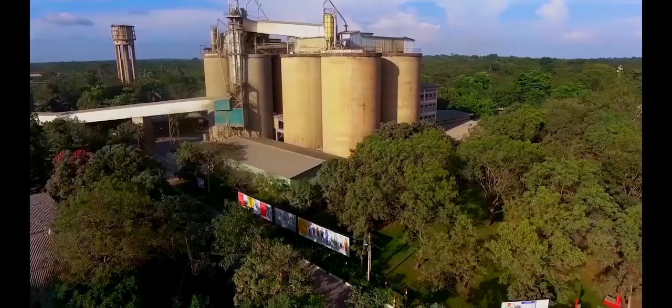INSEE is a proud member of the Siam City Cement Group Public Limited, a leading cement manufacturer in Southeast Asia. The Siam City Cement Group provides world-class construction materials to a host of countries around the world, including Cambodia, Bangladesh, Vietnam, Thailand, Indonesia and Sri Lanka. With a plethora of landmarks and buildings that define the skylines of these countries, the Siam City Cement Group pledges to be a role model in corporate governance and sustainable development.

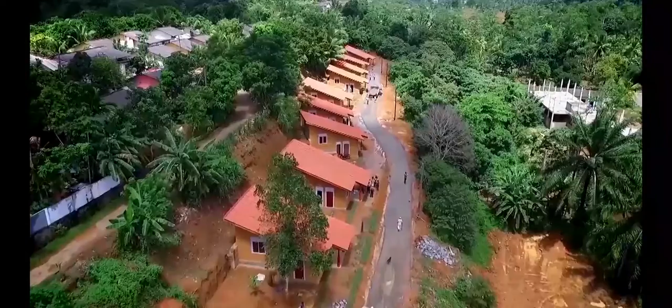INSEE Cement, Sri Lanka's premier cement manufacturer, is the brand behind our country's leading cement products and the driving force behind making Sri Lanka more sustainable. With a reputation built on outstanding performance in the quality of our products, unparalleled customer service, the dedication of our employees, our respect for the communities in which we operate, and our ambition to set the standards for the industry of tomorrow, we have contributed to the growth of Sri Lanka with iconic developments across the island.

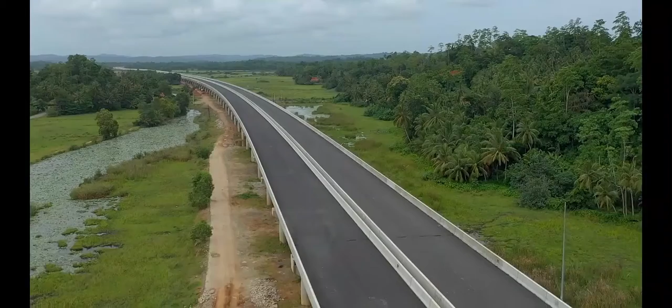Just to name a few: the Lotus Tower, Altair Residencies, the Colombo South Harbour, Southern Expressway, Mattala Airport, the Kalladi Bridge, the Kotelawala Defence University, Mahinda Rajapaksa International Cricket Stadium.

INSEE has cemented its position as the most preferred local manufacturer of cement in Sri Lanka, with its widespread distribution network comprised of over 7,000 dealers in retail segment located island-wide. Today, we have 2 plants in Puttalam and Galle and 2 terminals in Galle and Colombo.

INSEE's Sunstar brand is Sri Lanka's first cement product to be awarded the Green Labelling certification by the Green Building Council, and was the first blended cement to launch in Sri Lanka.

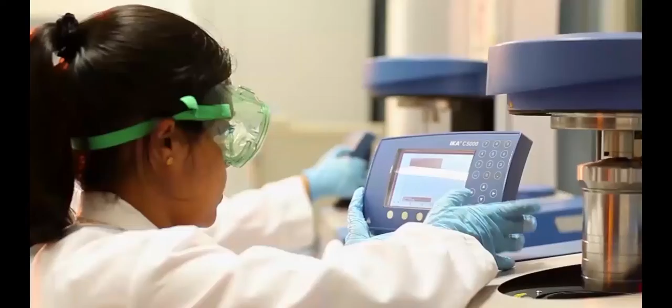INSEE has a wide portfolio of cements and services to suit all your construction needs. The most popular among them: INSEE Sunstar, INSEE Mahaweli Marine Plus, INSEE Extra for mass pouring concrete, INSEE Rapid Flow Plus, INSEE EcoCycle, INSEE Concrete, and Conwood by INSEE, a state-of-the-art innovation and development facility.

Professor Mudalige Thishan Renuke Jayasinghe, BSc Engineering Honours Moratuwa, PhD Cambridge, Chartered Engineer MIE Sri Lanka, MSc Sri Lanka, holder of Tall Building License of Urban Development Authority, and Senior Professor at the Department of Civil Engineering, University of Moratuwa.

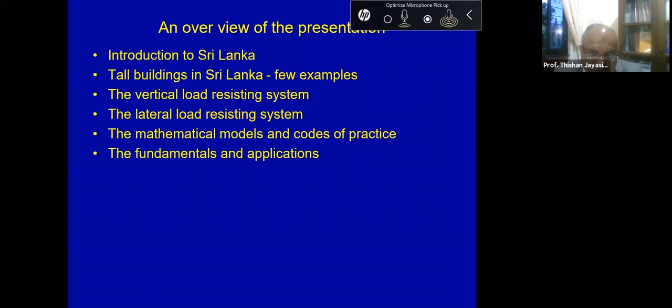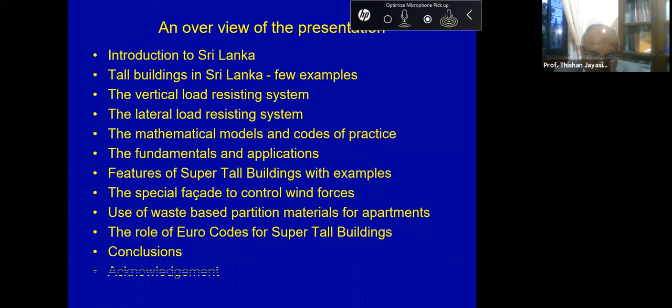Introduction to Sri Lanka, tall buildings in Sri Lanka, for example vertical load resisting systems and lateral load resisting systems, mathematical models, code of practice, fundamentals and applications, features of super tall buildings with examples, special facades to control wind forces, use of waste-based partition materials for apartments, role of Euro codes for super tall buildings, and conclusions and acknowledgement.

Okay, first let's look at where we are. A small island, 64,000 square kilometers, with a population of 22 million, about 2.5 million of whom live in other countries. Because of that we have significant foreign exchange inflow to the country, and we have considered it a good country to have tall buildings, especially in Colombo and other main cities, particularly apartment buildings.

So that we can have a large number of people living very close to the railway stations and so on. We have tropical climatic conditions, which are considered very good for retirement by many people. Because of that, with the right policies, it's possible to have many Sri Lankans who migrated to other countries come back to live here during their retirement, and that can generate significant demand for tall apartment buildings.

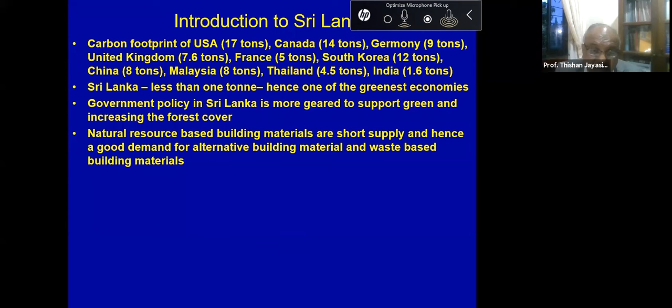If you look at some statistics, in Sri Lanka we have tropical climatic conditions, and because of that we have a very low carbon footprint, less than 1 ton. Again, we have government policy geared towards increasing forest cover, and there's also a shortage of natural resource-based building materials, so we are keen to go for alternative materials like EPS-based lightweight wall panels.

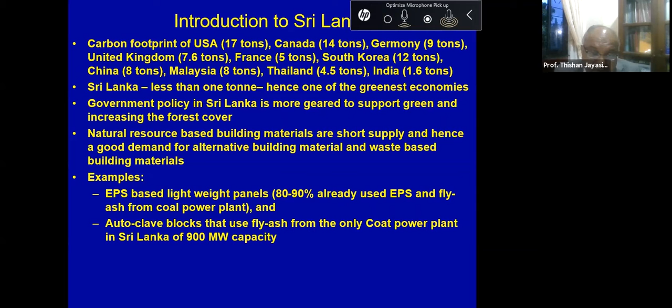About 80 to 90% of the EPS is already used once, and then we also use fly ash. We have autoclave blocks manufactured in Sri Lanka, and EPS-based lightweight blocks manufactured here too. So converting waste to building materials is a good business in this country, because we have high prices for natural resource-based building materials.

If you look at buildings, this is the tallest building at the moment in Sri Lanka, the 67-story tall Altair building. This is a picture taken while construction was underway. You can see the inclined tower made of steel was constructed without any support for 41 floors. During design, we actually checked the vertical tower for this particular condition.

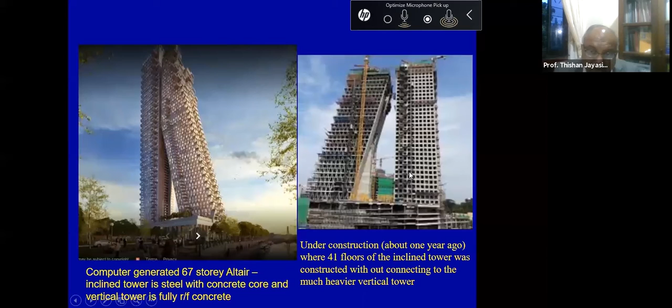You can see the center core is vertical, only the tower is inclined, so it's a fairly stable building. Although the tower is inclined, the support structure, or the main core or spine of the structure, is vertical, and here you can see the spine. This is a huge, large, heavy building, all out of concrete. Once connected, this building was quite capable of providing adequate lateral stability. This is a computer generated model, because I did the checking, and I also certified this building for the government of Sri Lanka as a safe building.

You can see it has a special shape where the facade is not uniform. It's a fairly irregular facade, and this is the main wind direction as well. So the facade facing the main wind direction was very irregular.

It was designed by a world famous architect, Moshe Safdie, who designed some of the best buildings in Singapore and all over the world. There's another structural engineer who worked with him, Predrag Gera. He's from former Yugoslavia, a very talented structural engineer who specializes in tall buildings and other buildings mainly.

I was the check engineer, because we have to make sure that we certify it. The coordinating engineers were Deepal Wickramasinghe and Mr. Bimal Fernando, one of my batchmates. That's why I got a chance to get involved in this particular structure, creating the model and analyzing it. The results of this model were used by Mr. Bimal Fernando and his team to check all the individual members, so that individual checking was done by them.

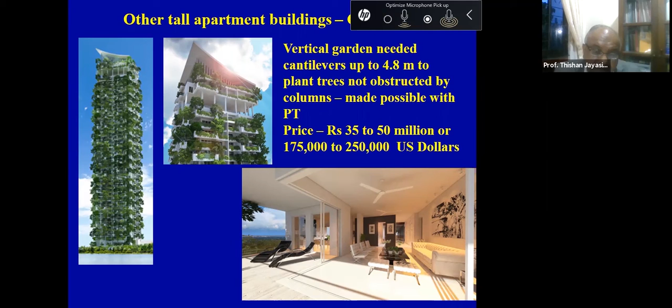Today he has designed the tallest building in Sri Lanka, still under construction, Colombo 606. Mr. Senaka has designed the tallest building, having 77 floors, in Sri Lanka, and he's a very good structural engineer.

And he designed this building as well. There is Sky Garden. And then he also designed this Fairmount building.

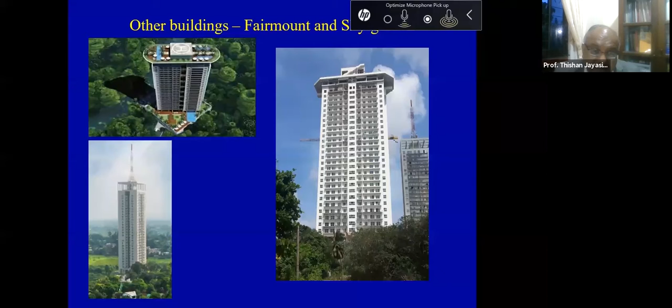The Fairmount building is the first tallest building undertaken by Maga Engineering on their own, not for anybody else, but for their own property development. Maga Engineering undertook this 32-story Fairmount building, and immediately after that they went for Sky Garden, which has double transfer floors. Again, Mr. Senaka designed these buildings.

Then this is Crescat Residencies. Again, I checked this building because it was initially planned as an office building but later converted to an apartment building. So because of that they wanted to check it. I made models, and this was checked in 2007 - I checked this building.

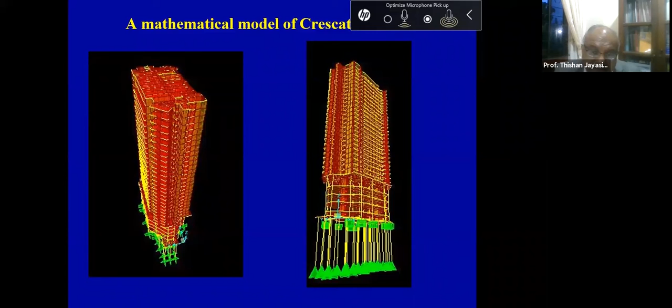So how do you get confidence when you are designing tall buildings? Can you get confidence by just following Euro codes or BS EN codes, or by developing a thorough understanding of fundamentals and theories? The most important thing is you must develop a thorough understanding, because codes will help you, but they will never give you the confidence to sign and certify a tall building, especially very special shaped buildings.

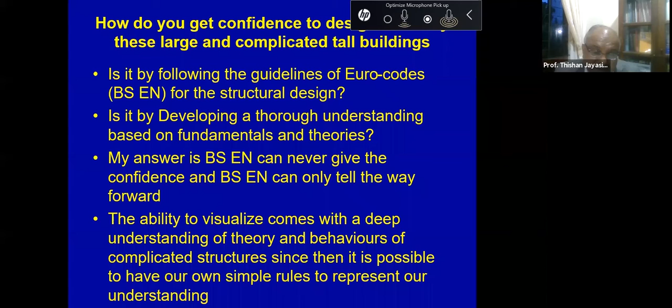Like Altair. So if you want to certify, you must be thorough with your fundamentals, and that's why we always encourage our students to learn the fundamentals and then applications, rather than going directly into applications.

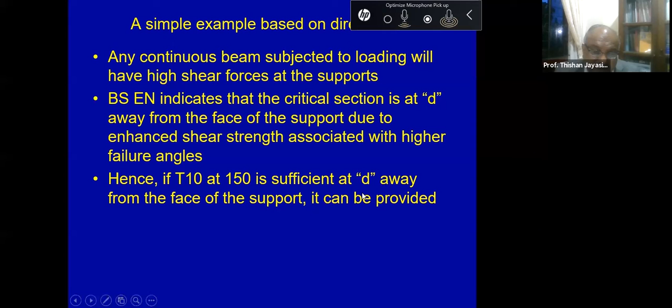So I'll take an example based on direct shear. Any continuous beam subjected to uniform loading will have high shear at the supports. When checking for shear, BS EN or Euro codes allow you to check it at a distance d away from the face of the support, and then you can provide the same reinforcement up to the support. So if T10 at 150 is sufficient at a distance d away, you will provide the same reinforcement within the face of the support and the depth d.

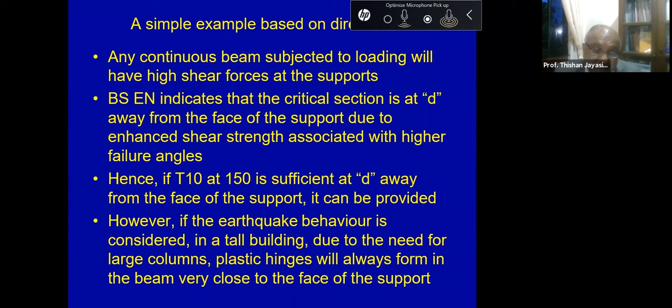But if you look at earthquake behavior, plastic hinges always occur very close to the face of the support. So if you just satisfy the rule given in Eurocode 2, you may not have a very safe building. You must look at Eurocode 8 as well, where you consider earthquake behavior, and then take the precautions given there as well.

So basically, you have to have certain rules that you have developed yourself. For example, if I am designing, I would not like to have a shear force more than 2 newtons per millimeter squared, because I know it's better to have a flexural failure than a shear failure. Flexural failure will always give us enough warning, whereas shear failure gives less warning.

So if I want to prevent a shear failure occurring, the ideal is - I know the maximum shear may be about 4.5, but if I keep the maximum shear stress less than 2 newtons per millimeter squared, then the chances of shear failure become very remote. Then if I am getting a high shear, I know the section I have selected is too small - that's why it's giving a shear failure.

In a reinforced concrete structure, increasing the width of the beam by 50 or 100 millimeters will not carry a huge penalty. So it's worth increasing the width of the beam by 100 millimeters rather than having a very high shear stress. You can have various rules, and the reason is you have to always think about which failure you would like to have, then ensure that particular failure occurs in the structure when it is overloaded. You take additional precautions against whatever failure you prefer. Generally, I like beams failing in flexure because it always gives sufficient warning.

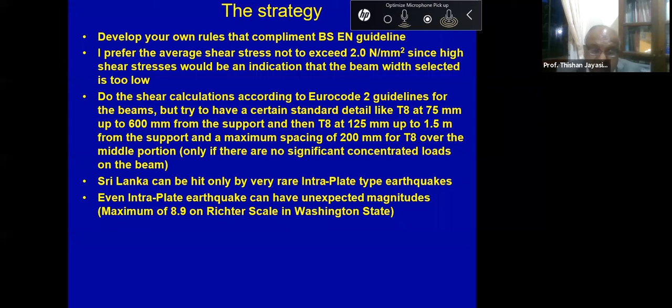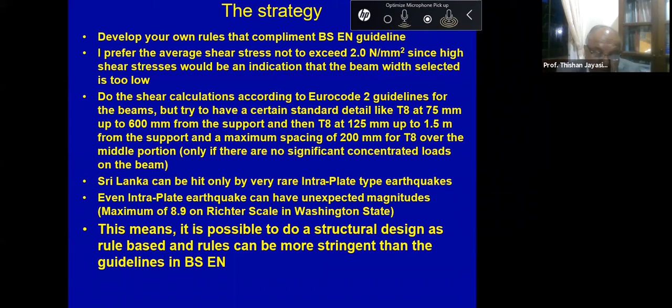So what you have to do is don't blindly follow the codes. Always develop your own rules, and then you can use codes and do the calculations. If the answers that you get do not tally with your rules, you can always recheck. But if you do not have your own rules, then there's no way you can check and ensure that your answers are correct.

So let's see some guidelines. In buildings, if you are considering the vertical load carrying system, the main vertical load carrying system consists of columns, walls, pile caps, and piles. Columns can be massive, but we can't increase the size of the columns too much, so because of that reason, we generally tend to use higher strength concretes in columns.

If you look at the Eurocodes, I will use only the cube strengths, because the Eurocodes allow us to use either cylinder strength or cube strength, so I'll talk only in terms of cube strength to avoid any confusion. We are allowed to go up to 105 newtons per millimeter squared, or megapascal, as the maximum strength, whereas in most constructions you will find that we are using 25 or 30 megapascal concrete.

Walls can be of any thickness, and as in Altair, if you want, you can use diagrids. The minimum reinforcement requirement in columns and walls according to Eurocode is 0.2%, BS code is 0.4%, but it's very usual to find that you are getting about 1.5 to 2.5% reinforcement.

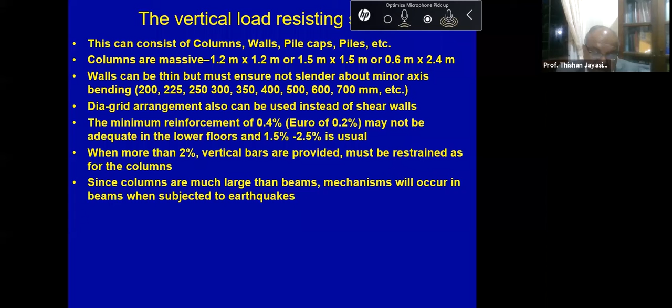So you can see, very special precautions are needed. Once you have this kind of knowledge, where you look at it in a more objective manner rather than just as a mathematician, it will give you a lot of confidence that your structures are good and correct.

You have to take adequate precautions when you are having columns, beams, piles, and especially the ground beams and so on. So you can see, you can have very special shaped buildings.

If you look at a normal building, first I'll talk about normal buildings like 20, 30 story buildings that you'll encounter often as apartment buildings. One requirement is you'll have a grid of 4.8 meter by 2.4 meter for car parking, that is the area. Then you'll have multiple car parking areas, and you might end up with a grid of 7.6 to 8 meters. The access to car parks also needs a minimum width of 7.3 meters.

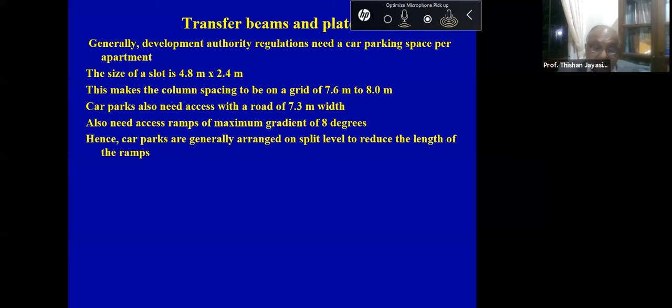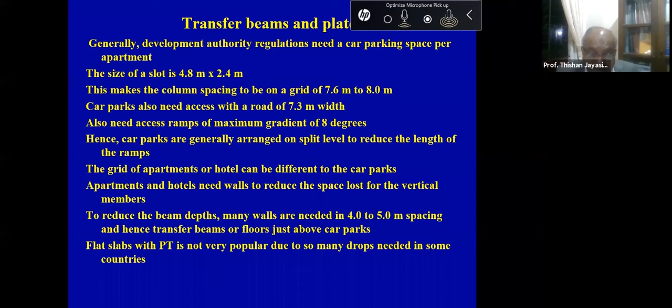Because of all these things, you'll find that you'll be using one particular grid at the car parking level and another grid above the car parking. Now this is our usual concept.

Basically, tall buildings are cantilevers, so we have to have adequate precautions like concrete walls and concrete cores. If the building is less than 10 floors, we can say all the lateral loads are taken by the shear walls. But when you have more floors, like more than 15 floors, you must consider the interaction between the frames and the shear walls.

When buildings become taller, we can employ outriggers, band beams, tubular structures, and bundle tubes. In this talk we'll be talking a little more about bundle tubes, because when you want to go for super tall buildings, bundle tubes will be the solution.

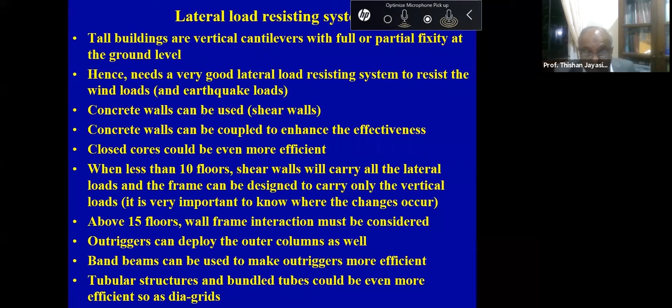Because any other structure will not be able to provide adequate stiffness. The tubular structure is an invention by a famous engineer called Khan from India, and these days we call the area he was born Bangladesh.

He actually got the inspiration by looking at bamboos. He thought, bamboo is hollow in the middle but it's very strong, and why it's strong is all the strength is confined to the outer periphery. So he thought, if you want tall buildings, it should be like a bamboo. People will use the inner part of the building, and the strength should be in the outer part. If you want stronger bamboo, you can combine a few bamboos and make them stronger. So all his concepts are based on what he saw as a kid in the form of bamboo.

He actually converted all his tall buildings, like 100-story and 110-story tall buildings, into that particular form. In recent times we've developed more forms, and one of those forms is called diagrids. Now we are familiar with diagrids because we have a diagrid in our Altair building.

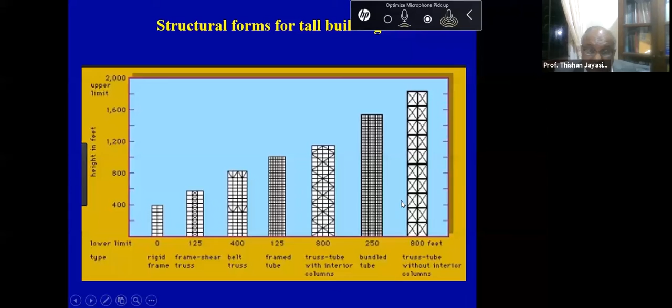If you look at all these buildings, you can see rigid frame buildings, shear walls, belt trusses, frame tubes, tube-in-tube, truss tubes, bundle tubes, and truss tube without interior columns. So you can have different structures, and in the very tall Burj Khalifa, they have used some truss system.

So tall buildings are very complicated structures. Because of that, we can perform manual analysis only to a limited extent. If you want to get the real behavior, we have to go for mathematical models, and we can prepare mathematical models by using many software.

For example, all the students in our University of Moratuwa get a full license for Midas Gen, Midas Civil, and the whole Midas family of software. We use SAP 2000 also to teach them, and they get limited exposure to ETABS, because when you know SAP you can very easily learn ETABS. But we concentrate more on the Midas family of software because they have the full license for it, including Midas GTS, NFX, NFS, and other modules.

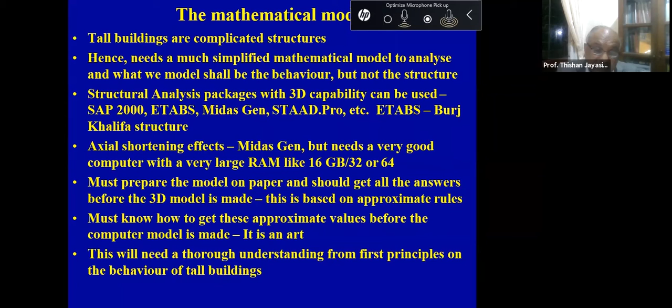So when you are designing, you cannot blindly make mathematical models. You have to have some idea about the answers that you should get from the mathematical models. Then only can you confidently use the mathematical models and the answers given by them. So it's an art, and you have to master this particular art of making a reasonable guess about the answers you should be getting. For that, you need a thorough understanding of structural analysis and the behavior and load transfers that take place as well.

So if you look at all these buildings now, you can see people are now thinking of 1 kilometer tall buildings. But if you look at all these very tall buildings, you can see there's no building at the top, it's only a spire. And in not so tall buildings, you can see the top part of the building becomes very small, the habitable area in the top part of the building is small.

No usable space. Another feature you can see is all these very tall buildings are having streamlined facades, glass facades, very, very expensive facades, because these facades should ensure that the facade is very strong. We also have to make sure the facade is made of material that is energy efficient, that does not allow too much solar energy coming in. There are so many requirements for these facades, so facades become extremely expensive. And because of that reason, most of our tall buildings are very expensive.

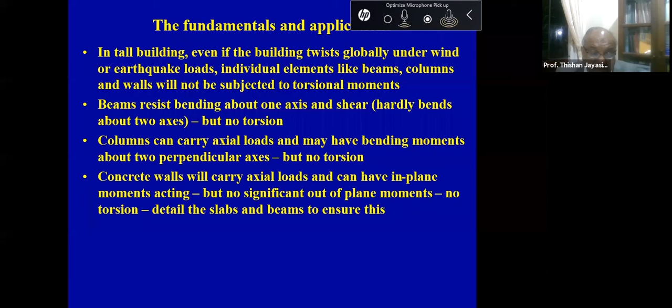Again, the beams will bend only about one axis, they will not have biaxial bending. Columns will carry mainly axial loads, and when you have very large columns, the moments acting on them will not have much influence. Concrete walls will be very strong in carrying in-plane loads, but out of plane, they are not very strong. So if you are expecting some out of plane loads on walls, it's better to go for thicknesses like 300 or 350 millimeters, so that the effect of out of plane moments will be very negligible.

Slabs can carry flexure and provide in-plane stiffness, but slabs cannot make beams stronger. There's a misconception among new engineers that when modeling, they model the slab and beam together and think slabs make beams stronger. It's a wrong perception, and you can get very wrong results by making such false assumptions.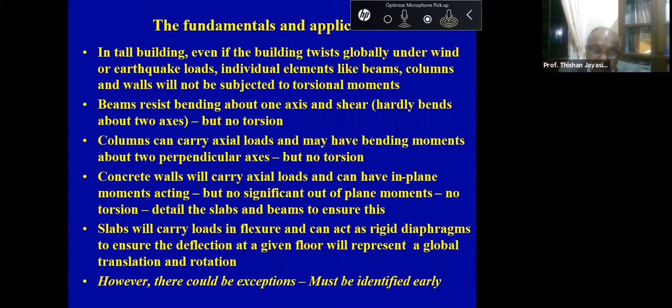That's why you have to learn proper theories of finite element modeling, and also FEM programming as students, so that you will have a thorough understanding of how FEM programs have been written. That gives you a good understanding of how to do the modeling. We call it art of modeling rather than science of modeling. Although these rules exist, there can be exceptions, so we must identify them early.

We have been talking about static behavior, but there are dynamic behaviors too. When it comes to designing, we have to see what a three-dimensional model can give us. A 3D model can give us the natural period of vibration of the building, and we can also get good earthquake analysis and wind analysis results from the 3D model. We can also get loads on columns, diagrids, and so on.

If we have transfer plates, we can again get loads, bending moments, and shear forces on transfer plates. But a 3D model will not tell us anything about slab design, and 3D model results cannot be used for beam design, because we don't get the pattern loading that codes recommend when designing beams.

When you make a 3D model of a structure, you can have walls, transfer plates, pile caps, and when designing columns, you can have load reduction factors, and these are all allowed in both Euro codes as well as BS codes.

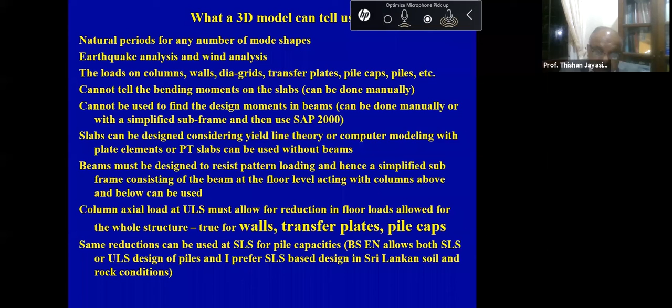When doing a model, here you can see a structure where below the car park levels we have beams and columns, whereas above the car park levels we have apartments, for which we have used walls. At the car park level, you can analyze these beam structures. When analyzing a beam, one assumption we make is that the beam is supported by a column and the column does not settle.

That type of assumption would be pretty good for 2-story, 3-story, 4-story type buildings. But when it comes to tall buildings, you can have differential shortening of columns, meaning different adjacent columns can shorten by different amounts due to the variable axial forces acting on them.

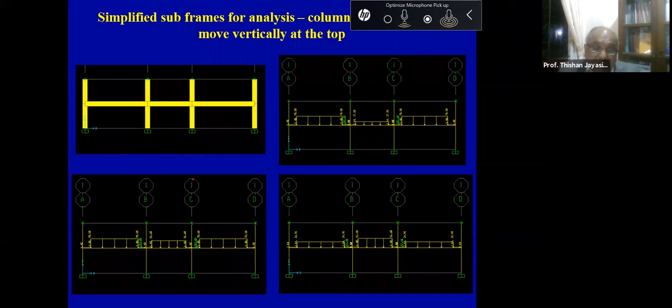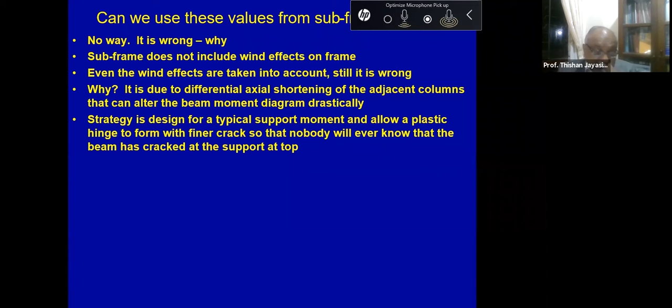If that is going to happen, we should not just use a simplified model with pattern loading. We must look at it in a more logical manner, because we are not including wind loads in such a simplified analysis. Even if you have included simple wind loads, you'll still find that differential shortening should be given some consideration.

When you are designing, you will look at the bending moments, but you'll also consider the possibility of plastic hinges forming close to the columns that can increase the span moment. So my general tendency is to over design the beam section in the span, but I do not over design the beam section at the support.

The reason is all the codes allow a certain degree of moment redistribution at the columns. Because of that, I do not really worry about the bending moment at the column, or the effect of bending moment at the column due to differential shortening. But to account for all these unforeseen effects, I will over design the beam in the span section by about 10-15%, or sometimes 20%.

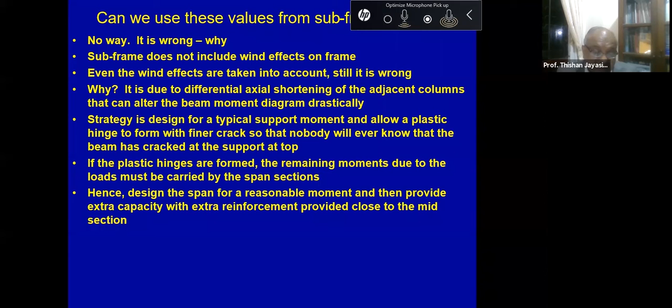When it comes to the design of columns, you can always use the tributary area and calculate the loads on columns. Beams also can have different sizes. So basically, it's possible to select beams, columns, and all the structural members in a tall building using simple calculations. But there's a big difference between a 2-story building and a 40-story building.

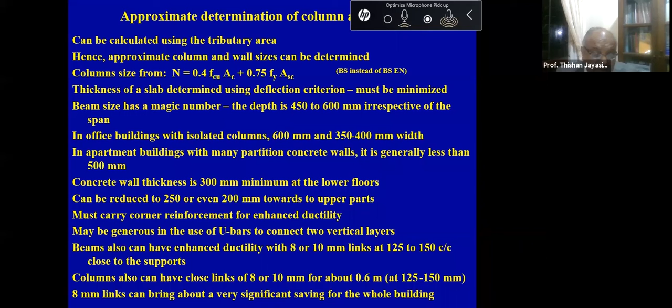In a 40-story building, in addition to doing the calculation, we should take some assessment of risks. Risk assessment is a very good initiative - you should train your mind to always be inquisitive and ask questions. This building is very different to a 2-story building. I have designed 2-story buildings, but today I'm designing a 40-story building. What can go wrong in a 40-story building that you do not get in a 2-story building? You have to always think about it.

When you are designing tall buildings, again we have another challenge. Just because we have risk, we cannot be over designing. We have to be accurate with our designs.

So how we optimize the building is we look at the structural elements that cannot go wrong, and we also look at the elements where things can go wrong. If you take a normal building with beams, slabs, columns - slabs cannot go wrong, so we optimize the slabs. In beams, beams cannot go wrong at the support, but beams can go wrong in the span. So we over-design the span, but not the support. Then we also look at shear carefully, and also try to see whether torsion occurs.

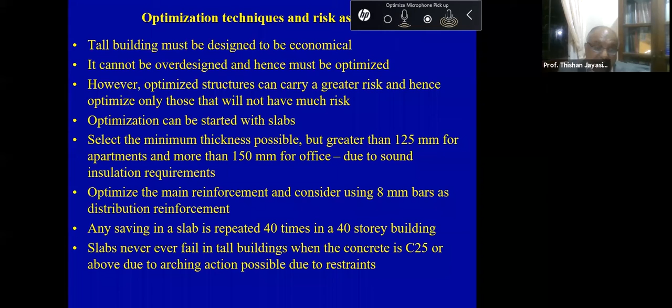When it comes to slabs, we optimize as much as possible. But when it comes to columns, in the top part of the building it's not a big problem, but in the bottom part of the building, we'll be very careful with the columns, because if anything goes wrong with a column in the bottom part of the structure, things can go wrong drastically.

We have seen one building collapsing in Miami, and nearly 100 people died. That type of collapse is totally unacceptable. That collapse would have occurred due to the engineers underestimating the effects of construction sequence on the transfer plates. I think that is the final finding of the teams.

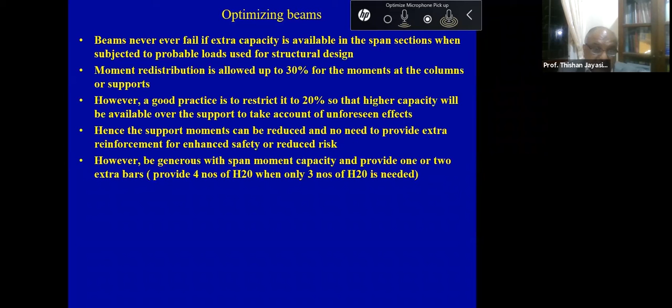So basically, when you are designing, you have to do a risk assessment, see which element can fail, and any element that you think has a tendency to fail, you will provide extra reinforcement and extra moment capacity and extra shear capacity. And if you think there's any element that can be subjected to axial shortening and induce plastic hinges, then rather than using very large diameter bars, you will use a number of small diameter bars so that cracks will occur, but nobody will see the cracks.

So likewise, you have to get a deep understanding of the behavior of the structure, and then do the detailing rather than blindly doing the detailing just by looking at the reinforcement area being 880, then just providing 2 bars of 25mm diameter, because each 25mm diameter bar is 490 square millimeters. That type of calculation is not acceptable.

You have to always see what the spacing is, maximum spacing between bars, or whether it's better to have bars at a closer spacing than a larger spacing. If the area is 880, you might see whether it's better to use 3 numbers of 20mm bars than using 2 numbers of 25mm bars. Not to save steel, but when you have 3 numbers of bars, the crack widths will be smaller. So even if something goes wrong, still nobody will see any cracks, and no cracks means no investigation, nothing to worry about. So likewise, you have to think about it.

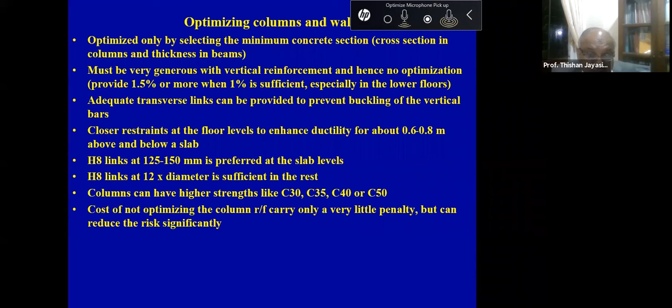And when it comes to columns, always, you will see the possibility of columns failing due to providing too little reinforcement. And you will do a risk analysis, and then again see at which level you have to provide special additional reinforcement.

When it comes to concrete, it's always good to use high strength concrete where necessary. But if you are using large sections like in a transfer plate, that means the structure is not optimized. So in such a situation, there's no need to go for high strength concrete for transfer plates, because we are using huge sections since the load transfer needs huge sections.

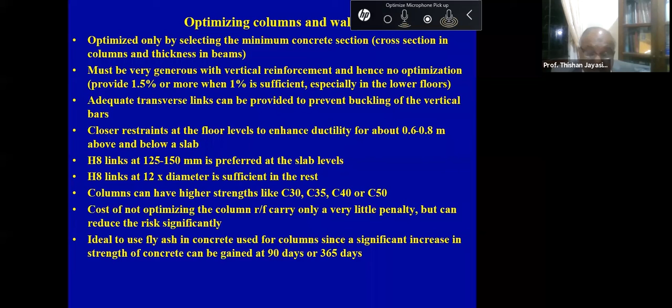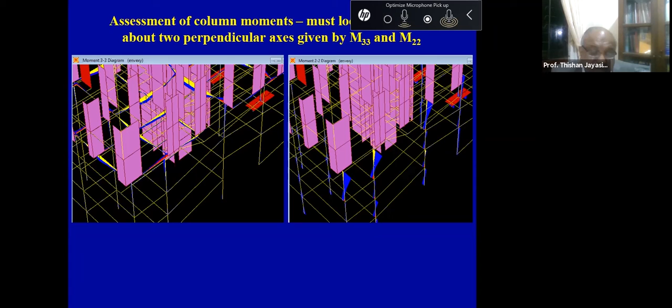When you are designing, you have to be very careful. If you look at this particular column, you can see this is M33 and this is M22. Generally, we look at M33 all the time, but in this particular case, M22 is massive. So you have to always look at all the different moments and forces. You should not think you'll only look at M33 in the design. You must always look at all the different moments.

When you are modeling in Sri Lankan conditions, it's always possible to model the superstructure with the substructure together. This kind of modeling is totally acceptable because we have bedrock, so you can model the superstructure and substructure all together and get accurate results.

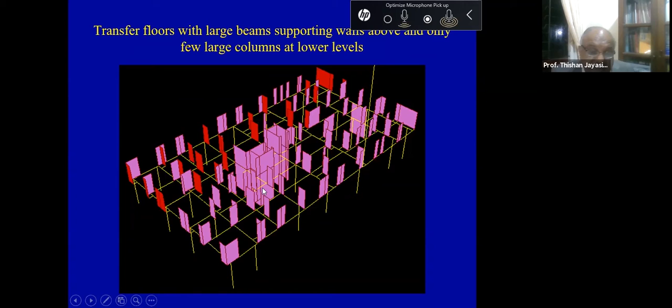You might get situations where transfer plates are there, and you can see some of these walls are not on the center of the beam, some are on the side of the beam, away from the beam. This means some of these large beams can be subject to torsional moments in addition to bending moments.

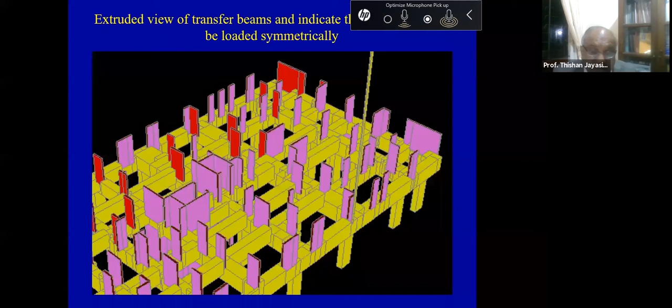To take account of that, you have to design the beams for torsion. Most of the time we don't design beams for torsion, but when it comes to transfer plates, you have to design them for these moments. So you can get torsional moments with additional reinforcement, and sometimes you will find the shear links are not 10 millimeter now, they are 20 millimeter diameter bars. The reason is these are not shear links, they are torsional links.

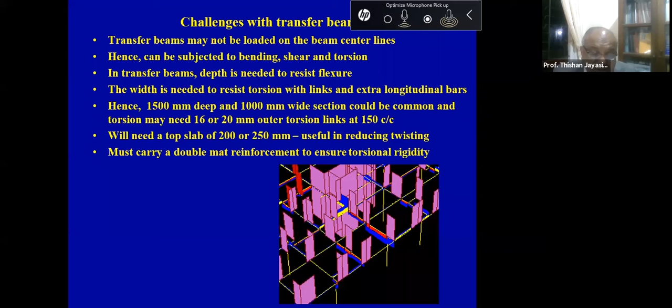You have to develop a good understanding of all these different aspects, because most of the time students are concerned only with designing for bending and shear, but you must also learn how to design for torsion. And when you have massive sections, we have a different problem, which we call delayed ettringite formation. That should also be paid attention to.

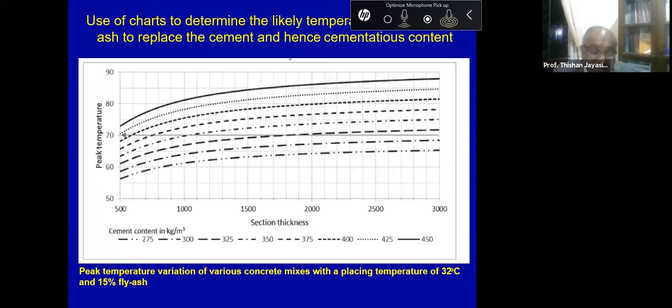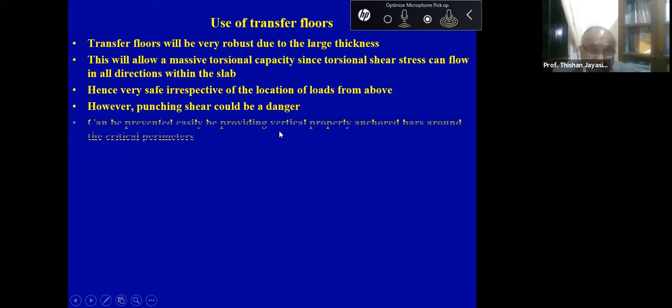To help you sort this out, we have developed a set of curves that will help you predict the maximum temperature reached by different types of concrete mixes. You can download this paper just by typing MTR Jayasinghe DEF, delayed ettringite formation, and read the paper. We have solved one of the biggest problems that engineers faced. Now you can easily use this paper to predict the maximum temperature, and see whether the concrete mixes you select give temperatures over 70 or below 70, with 70 given as the margin.

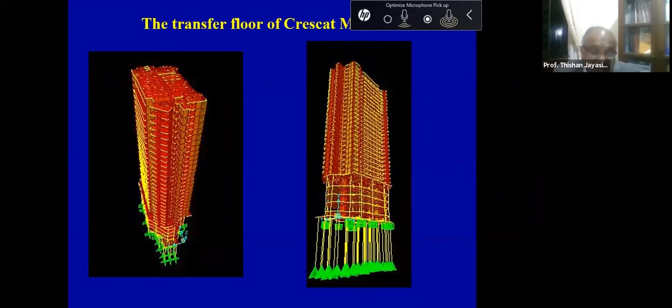We talked about transfer plates, and we have so many buildings in Sri Lanka having transfer plates. This case has a transfer plate here, and we have to design them very carefully. Sometimes they cannot be cast in one operation. You have to cast them in stages, where first you design the first 350 or 400 millimeter thick slab to carry the weight of the concrete above, because it's very difficult to get formwork.

This is another classic example of having a transfer plate at the 10th floor. This is Cinnamon Red Hotel. When you enter at this level, you go to the 7th floor, and at the top of the 7th floor you get the restaurant. Then above all that, you get a transfer plate at the 10th floor level. To cast a transfer plate at the 10th floor level, the biggest problem is the weight.

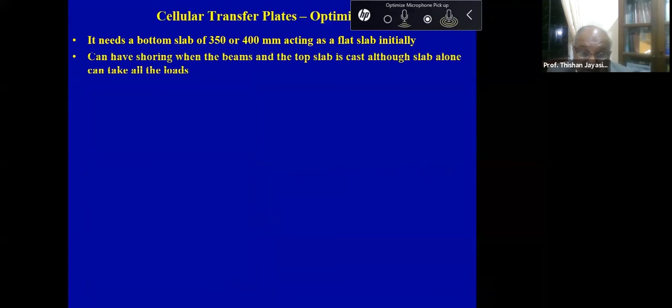We solved that problem by going for a cellular raft, a cellular transfer plate, where we cast the bottom part of the transfer plate first, then form the voids, and then cast concrete around it.

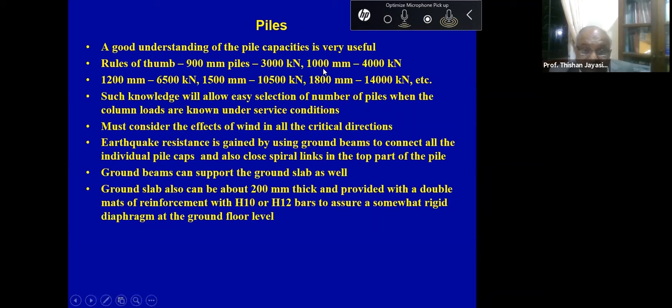When it comes to piling, we have rules of thumb. For different pile diameters, we have different capacities, but these are for normal situations. When it comes to super tall or large buildings, that type of simple pile calculation is not applicable. You have to go deep into it and see how much extra socketing is needed to develop skin friction. Using the ICTAD guidelines is too restrictive; you cannot rely on them.

So what you do is go for pile load testing, PDA testing, and maintain load testing. A normal guideline for a 1,200 millimeter pile is 6,500 kilonewtons, but in Altair we used 11,000 kilonewtons for 1,200 piles. For 1,500 piles, the normal guideline is 10,000 to 10,500 kilonewtons, but in Altair we used 17,000 kilonewtons.

When the structural engineer said he wanted to use 17,000 kilonewtons for the 1,500 millimeter pile, the geotechnical engineers did not like it very much. But we said unless we use 17,000, we cannot have such a tall building. Whether you like it or not, we are going to do load testing, maintain load testing, and PDA testing, and decide the pile load carrying capacity based on that testing rather than theoretical predictions. We found our guess was better - the maintain load testing and PDA testing proved our guess of 17,000 was more appropriate than using very low values.

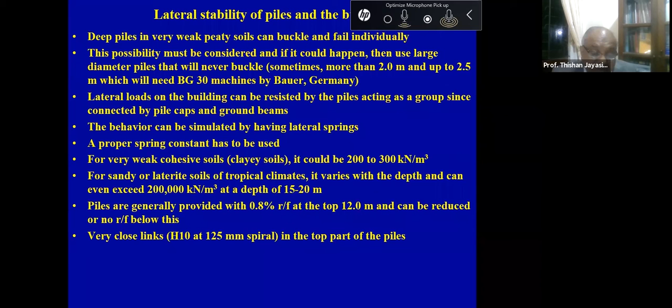You also have to think about piles in weak soil conditions and their lateral stability. For that we can use Winkler spring methods, and we teach these methods to geotechnical engineers even in the final years of the program. Those taking large structures learn these theories, and for their comprehensive design projects they use not only their own lecture notes but even MSc notes, because we expect students to go deep into the subject rather than staying at a shallow level.

You can have springs representing the soil conditions and so on. So there's a lot of information and work that you don't generally need for a 5 or 6-story building, but you do for tall buildings.

But these are not super tall buildings - these are tall buildings, something like the 20, 30, 40-story range. When you move beyond 50 stories, now you are thinking of fairly tall buildings or super tall buildings.

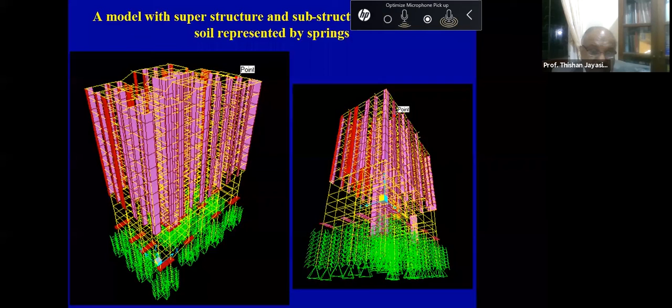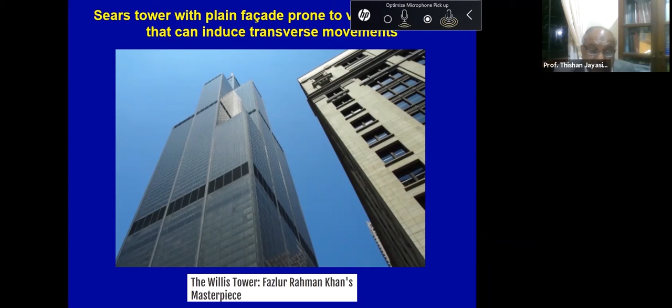This is one of the tallest buildings, a very efficient building, originally called the Sears Tower and later renamed Willis Tower. It is a masterpiece by a particular engineer who was born in 1929. He died at the age of 53 but is considered a very good engineer. He is called Khan - Fazlur Rahman Khan - who was born in North India, on the eastern side that we call Bangladesh today. But in 1929 there was no Bangladesh; it was part of India.

So this building is made out of tubes - we call it the bundled tube concept. Khan invented this bundled tube concept by looking at bamboo. He looked at bundled bamboos and thought, if I make the outer periphery of tubes strong, then I can have a strong building. So he used that. Then they added an observation deck called the Ledge, where you can go and see about 1,500 feet below.

And then the Burj Khalifa - they used a very special truss arrangement in addition to massive columns to stabilize the building, and stabilizing the building is always a problem when it is too tall. Although it's 828 meters tall, above 640 meters there's no habitable space. One of the problems with all these buildings is they are massive at ground level but become smaller and smaller as they go up - you have massive area at the ground level, but the areas get smaller higher up.

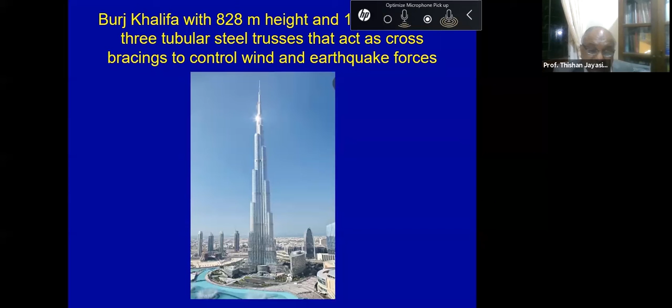That is not a very good thing, because you spend a lot of money and then you don't get much space.

This Khan was born in Bengal, in the northern part of India. We have a special relationship to this part of India, because King Vijaya came from that part of India. The language he spoke was Bengali, and 50% of the words in that language come from Sanskrit. Most of those Sanskrit words are exactly the same as the Sanskrit words in formal Sinhala that we use here, because Sinhala is a combination of the Bengali language and the language that the people in Sri Lanka spoke. So in our formal Sinhala we have a lot of Sanskrit words, and those are exactly the same as the Sanskrit words used in the Bengali language, which makes up about 50% of that language.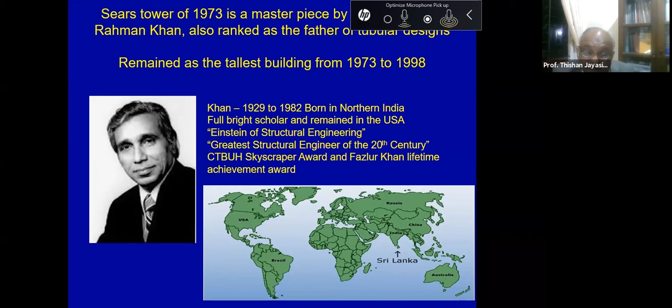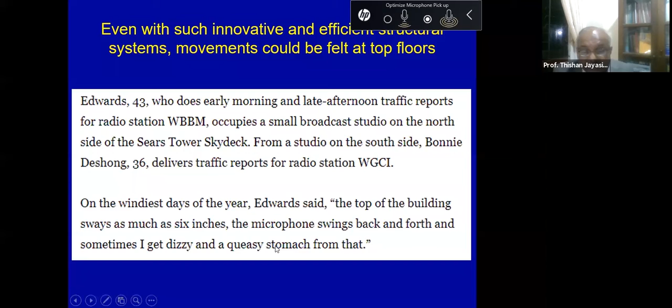One of the biggest problems with all these buildings is movement. The people actually reporting on traffic conditions from the 103rd story of this building have a big problem: on a very windy day, the top of the building sways as much as 6 inches, the microphone swings back and forth, and people feel giddy and dizzy. So it is a problem.

Then again, we look at another building. Everywhere in the world they always use very smooth facades, and building movement is a massive problem. This particular building, called Crown Resort, is in Sydney, Australia, and it's designed by a Sri Lankan engineer.

The Sri Lankan engineer is Dr. Dhammika Maharaji. He did his BSc at Moratuwa in 1997, and his PhD at Queensland University of Technology under the supervision of Professor Mahen Mahendran, completing in 2003. He then worked doing research, and later worked under Mr. Nimal Perera, one of the greatest engineers in Australia, again a Sri Lankan. He then became a master of the game, and designed the 120-story tallest building in Malaysia, as well as this particular very complicated building in Sydney, Australia.

Even today he is involved in two buildings, one with 45 floors and another with 60 floors. He is considered the brain of the Brisbane branch of a big company called Robert Bird Group, owned by the Singaporean government.

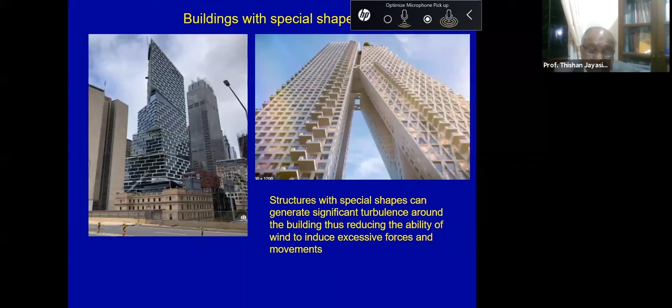One feature of all these buildings is that they have smooth facades, streamlined flow, and vortex shedding problems. Now we are starting to see special buildings, and this is one of them, located in Colombo close to that particular tower. If you look at this building, it's very special because instead of smooth facades, it has very rough facades. So if you want to defy the wind, a rough facade is the rule.

You can see it's rough where the wind comes from this direction. When the wind comes from the other direction, it's okay because the building is very stiff, with no movement. So Altair is a very stable building, although it's very tall and also inclined, with a very special shape, but still very stable.

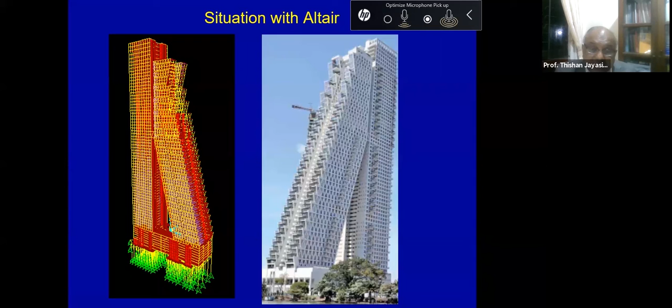So to overcome all these effects, we have to create turbulence. We came up with a new model. In our new model, we are going to have a double facade. Looking at this particular building, we will have a facade here with handrails and vertical columns at 2.4 meters, then the parapet wall and handrails, and then we will fill that area with laminated glass. You will ask why.

The idea is we want to have a facade so that no kid will have a chance of being blown away, and also we want to make sure that all these areas are protected, but we allow wind to leak. So when the wind is leaking, can wind exert forces? No.

In addition to that, we have columns like this, beams, facades. Why? We want to have lightning protection. When you have a steel cage, we have a Faraday's cage. So the other idea is to create a Faraday's cage by having precast floating columns. These floating columns, and the walls, again to create turbulence, we don't mount the panel at the front of the column, we mount it at the back of the wall, back of the column.

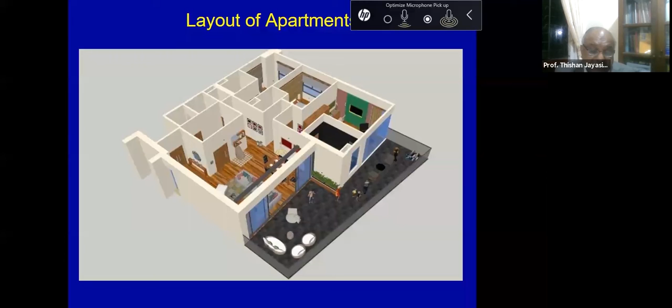Then, how about the partition materials in these walls, in these apartments? Do we have to use very expensive partition materials, or can we go for waste-based partition materials? My idea is no need to use very special ones, because already we have a facade protecting the building, and all the others are double facades, or a facade after a facade. So no need for very strong materials, but you can use this kind of waste-based lightweight materials, and they are very strong materials, stronger than bricks and blocks, and you can see the load bearing.

The way that these have been used for load bearing, we have tested them with proper load testing, and you can see they are very strong materials. This particular house, a 2-story house, was constructed in 20 days. That's the advantage of all these new materials, manufactured by the large factory of Mr.

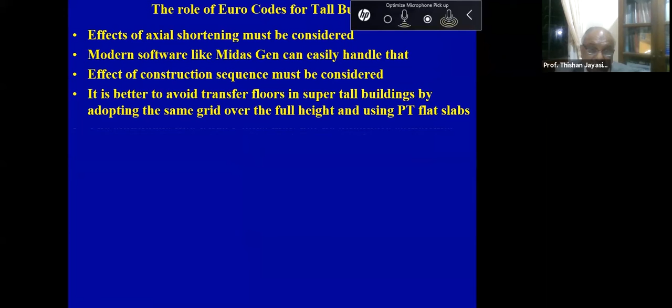Niranjan Fernando, who is having huge wealth, because he has gone into the manufacturing based on waste materials. So there are many things that we can learn from all these.

The main thing is, we have overcome one of the biggest problems of tall buildings. Here you can see this is the arrangement that you can easily use for a 60-story building. Then how about a 120-story building?

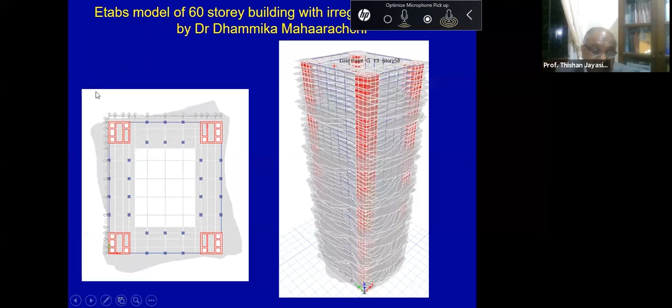What we do is we repeat this and create bundled tubes. Now this is one tube. Then what we do is we create additional tubes around it. By creating additional tubes, as they have done in Sears Tower, you get additional tubes, similar to Sears Tower, where you can see there are tubes. So create additional tubes.

Then we can even think of going for something like nine tubes, and we might be able to go for massive heights like 1 kilometer tall buildings or 800-meter tall buildings. But the difference between our 800-meter tall building and the Burj Khalifa is that Burj Khalifa's 800-meter height cannot be fully used, whereas our building can be used because it's not going to change its shape.

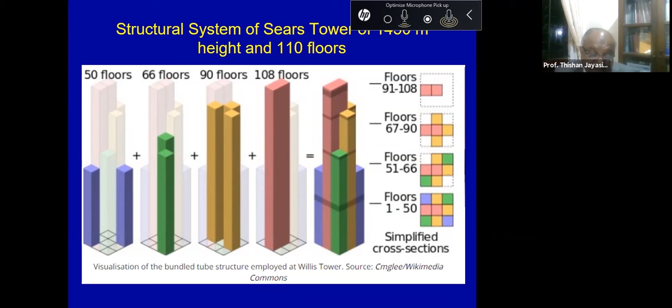So in the lower part of the building, all these can be the fully utilized floor, but as you go to the top part, you can have the center courtyard. Then with this one tube, create more tubes, and then you can go for taller buildings.

That is the concept. And then to do all these things, we have very good foundation material, and it is rock. Sri Lanka is an ideal country for very tall buildings because we have the ideal foundation material.

If you try to do a foundation in any other country, you might spend about 3 times the foundation cost that you spend in Sri Lanka. If you are doing a foundation in Thailand or Malaysia even, the cost can be 3 to 4 times the cost that you have to incur for the foundation that you do in Sri Lanka.

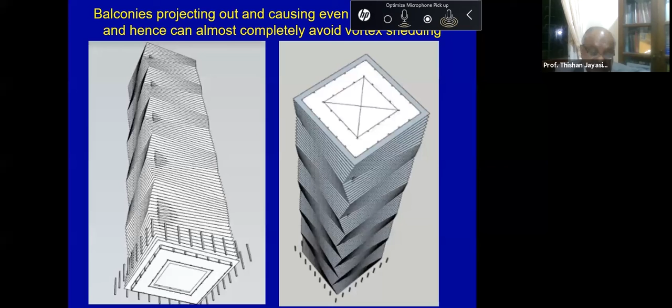So Sri Lanka has very favorable conditions, and if we go for tall buildings with very cost-effective structures, we might be able to sell our apartments to many people, especially those who migrated from our country, who might consider buying apartments for something like 100,000 or 80,000 Australian dollars, because to buy a house in Australia they need at least 300,000 to 600,000 Australian dollars, depending on the location.

And in some places, they need even 1 million Australian dollars. So buying an apartment for 100,000 Australian dollars in a building where there are a lot of shopping malls and all kinds of facilities will be very attractive for them. We are in a position to create huge business in this way.

At a moment where Sri Lanka is facing a dollar crisis, this might be one of the ways that we can come out of the mess. And the other way is organic farming, where if we can say all our food is certified as organic, we might be able to sell most of our produce to other countries at a premium price, and then again come out of the mess. So we have to think of all these things.

And then not only that, sometimes we have to see, are these Euro codes sufficient? You will see the Euro codes have certain limits, like the maximum cube strength is 105 megapascal. Sometimes when you go for super tall buildings, we might have to use concrete having 150 megapascal. And then you'll ask, can we make 150 megapascal concrete?

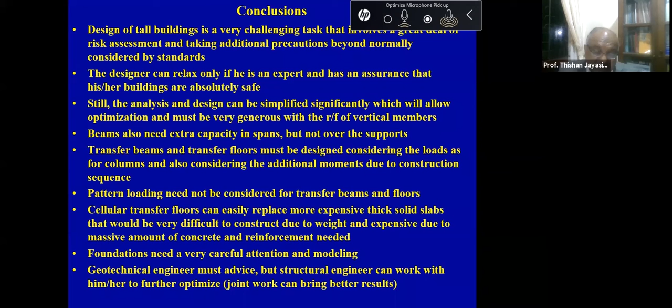And for that also, we are now in the process of working out the possibility of manufacturing trains in Sri Lanka rather than importing. Our initial studies show we can make a train for 120 million rupees, whereas the imported one will cost 600 million rupees. So likewise, if we start doing things our own way with our own resources in Sri Lanka, Sri Lanka has a great opportunity to come out of the current economic hardships created by various unplanned developments in the earlier days, and also the COVID situation that prevailed in the last 2 years.

So with that, I would like to conclude, and the message is, tall buildings are possible, and tall buildings offer many challenges, and super tall buildings are also possible. But the difference between tall buildings and super tall buildings is that in super tall buildings we should not use transfer plates, whereas in tall buildings we can use transfer plates. So that is the difference. So in super tall buildings, we have to make certain sacrifices in the lower floors because we are not supposed to use transfer plates, so we cannot optimize everything in a super tall building.

Either the car park can be optimized or the apartment can be optimized, so we have to decide whether to optimize the apartment or the car park. But we should totally avoid transfer plates in super tall buildings. And also I have shown you how to minimize the wind effects, which means the super tall buildings can be designed for axial loads rather than lateral loads, which will make it very attractive to design super tall buildings in the range of 150 to 250 floors, or going up to about 1 kilometer, especially in locations where we like to have so many people living with all kinds of buildings with so many facilities like gymnasiums, walking tracks, supermarkets, food courts, everything in one building.

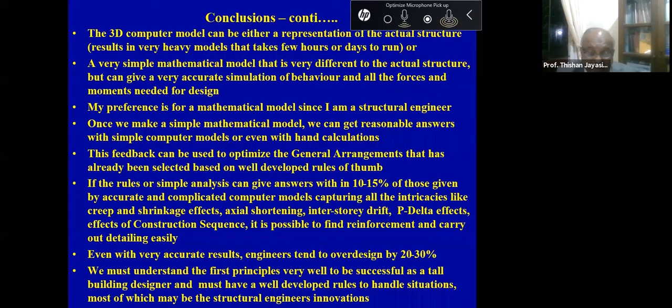And you can even have things like a school in the building, because in the lower part of the building you don't need to have a courtyard concept, whereas in the top part of the building you can have the courtyard concept to provide adequate lighting for apartments. So with that, I wish to conclude. Thank you very much for your attention, and I hope you would have got some questions.